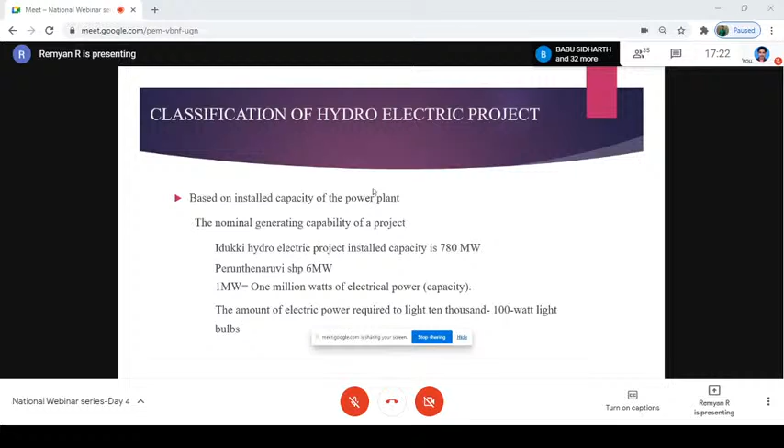One more thing: you can see that power equals 9.81 into H into Q. That means power is a function of net head available and discharge. If the head available is very high, you will get a very high power. Similarly, if discharge is high, you will get very high power values.

It depends on the type of project. Sometimes it is not possible to get more head, but discharge will be very high. For example, in our Bhoothathankettu hydroelectric project, the available head is maybe 10 or 12 meters, but the discharge is very high. So we propose this project in Bhoothathankettu.

Depending on the head available and discharge, there will be changes in turbine selection. If discharge is very high and the head is varying linearly, you can select a bulb turbine. In Bhoothathankettu we use a bulb turbine because head is varying but discharge is almost very high. So we selected the bulb turbine for the Bhoothathankettu hydroelectric project.

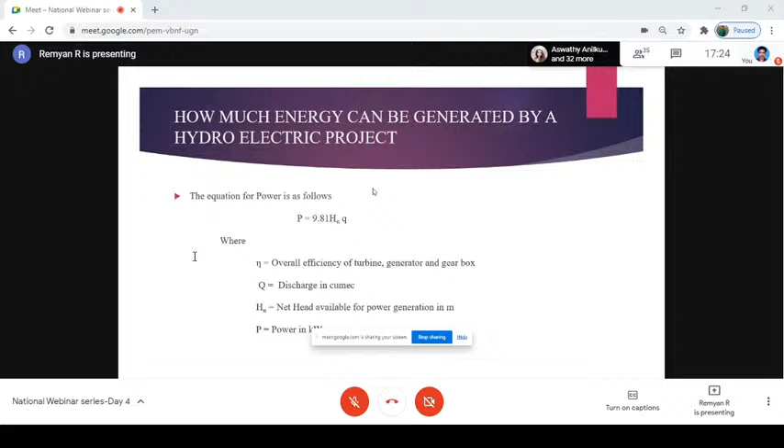Now, the classification of hydroelectric projects. Different countries follow different capacities for this classification. In India, if the installed capacity is up to 5 kilowatts, it is known as pico hydro, and up to 100 kilowatts is a micro hydro power project.

If installed capacity varies from 101 kilowatts to 2 megawatts, it is known as mini hydro project. If installed capacity is 2 megawatts to 25 megawatts, it is known as small hydro. Today our topic is small hydro, meaning the installed capacity varies from 2 megawatts to 25 megawatts.

This will give you an idea about the small hydro definition in different countries. In Italy, if installed capacity is less than or equal to 3 megawatts, it is known as small hydro. In Afghanistan and Iran, it's less than 5 megawatts. In Bangladesh and Thailand, less than 15 megawatts is considered small hydroelectric. In the US, it's less than 30 megawatts. In China and Pakistan, if installed capacity is less than 50 megawatts, it's known as a small hydro project.

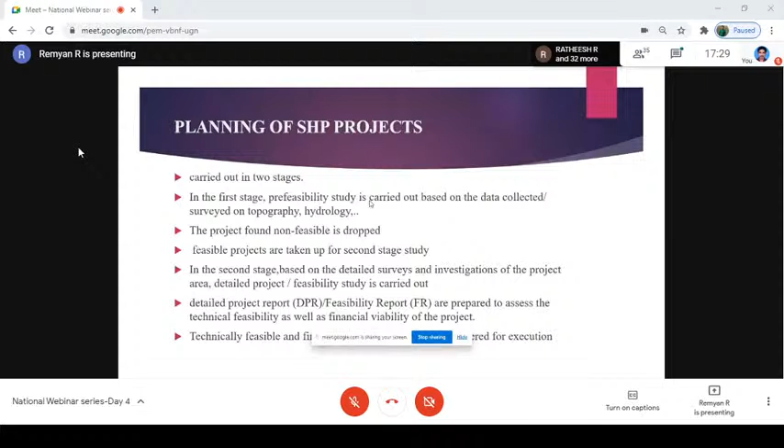Now, the types of small hydroelectric schemes. The most common small hydroelectric projects are run-off river, canal falls, dam-based outlet and spillways, pumped storage, and in-stream. Actually in KSEB, we mostly focus on run-off river.

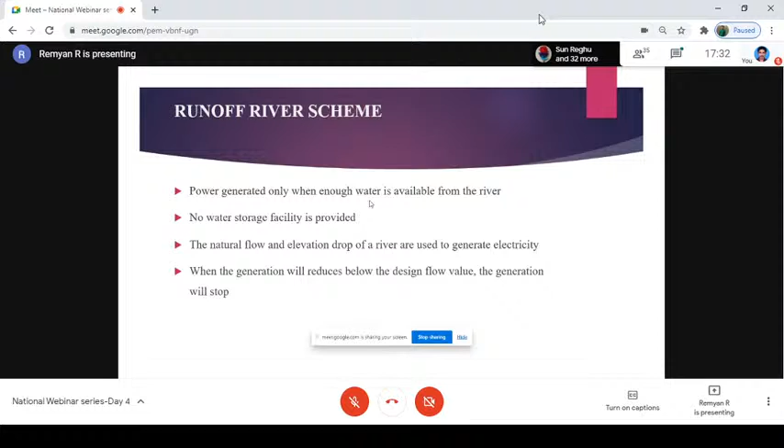When the generation will happen - okay, then this is the layout of the run-of-river schemes. We'll discuss all the components in detail.

Typical layout of a run-of-river scheme consists of an intake structure. This is the intake structure. Then there will be a desilting tank. This is the water conducting system or head race channel. Then there will be a forebay. Then another water conducting system, known as penstock. There is a difference between this penstock and head race channel - we'll discuss later. These are the main components. Then there will be a powerhouse, then tail race channel. These are the main components of a run-off river scheme.

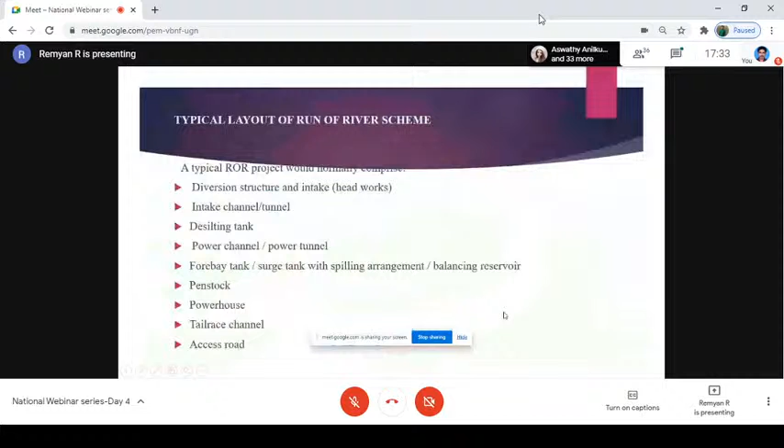Now the intake - first component is intake. Intake is a structure controlling entry of water from the river into the water conductor system. It prevents entry of trash, debris, and other floating materials, prevents entry of ice, and reduces the silt content. It secures the entry of water with minimum possible loss of head.

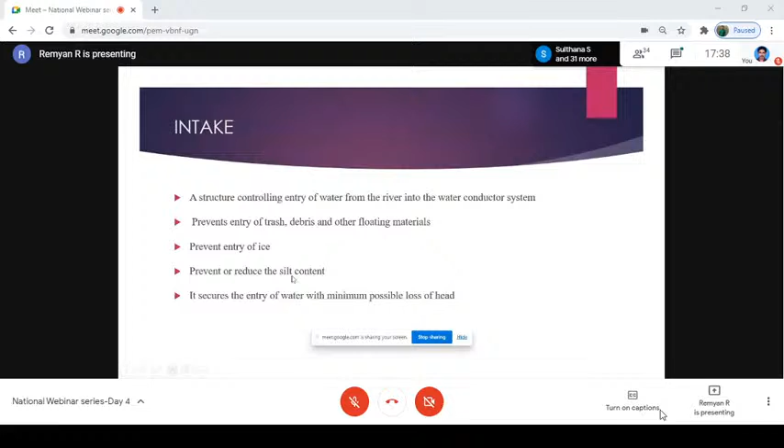Then there's the silt content. It's very important in Himalayan regions, though not in Kerala, since silt content in water is very high there. So we reduce the silt content, though it can't be entirely removed in the intake structure. Actually, it secures the entry of water with the minimum possible loss of head.

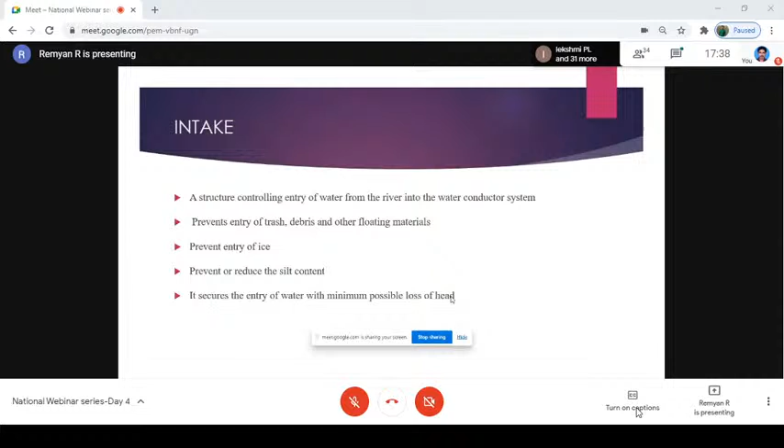For reducing the loss of head, we are providing a well smooth transition there. If you provide sharp edges instead, there may be high loss of head.

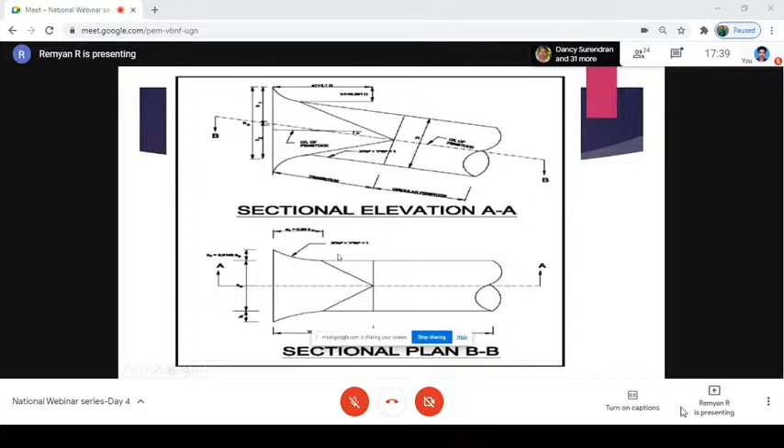This is the longitudinal section, and this one is the plan. The section is varying in both plan and elevation.

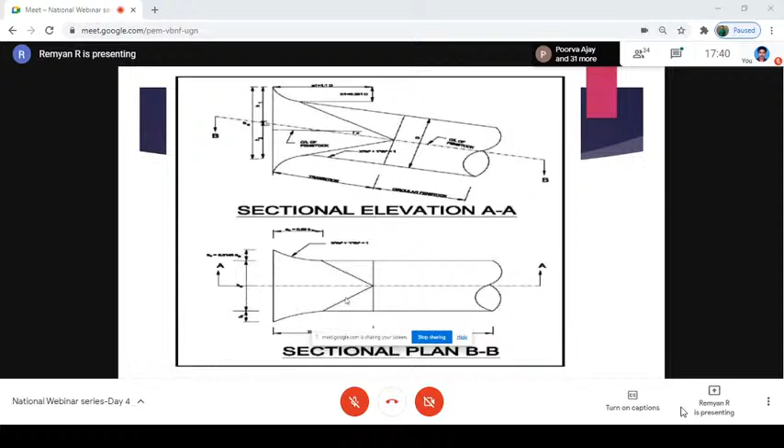The next one is the desilting tank. This one is a desilting tank. We are providing a desilting tank here. After entering water through the intake, it goes to the desilting tank.

Desilting tanks are provided for the settling action of small suspended particles. Now the water is flowing from this direction to our main desilting tank, which is provided here. Again, we are providing a smooth transition region here for settling the suspended particles.

The suspended particles can be removed through the desilting flushing tunnel. We are providing flushing tunnels here, and by flushing this, we can remove the silt content.

The water conducting system. This is our water conducting system. In between the forebay and desilting tank is the water conducting system, or head race channel.

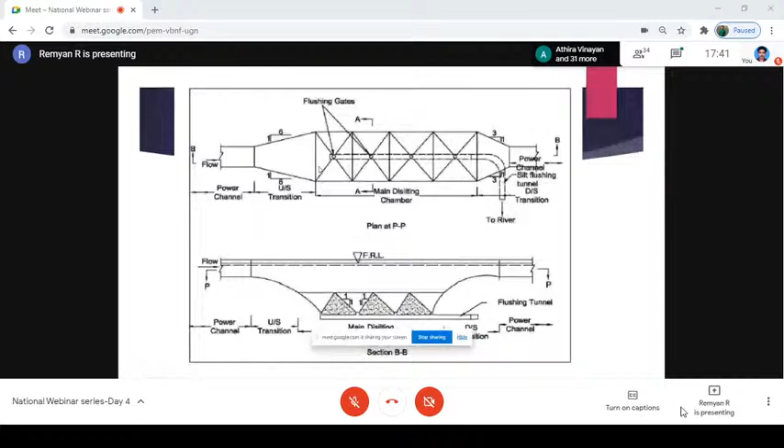There are different types of water conducting systems available. The first one is the earthen water conducting system, or unlined system, just like our soil surface. There is no lining or anything, it's soil itself. This is a canal section in cutting.

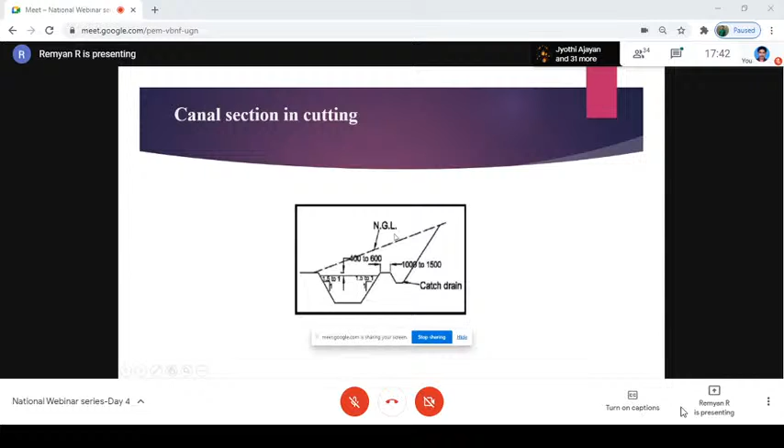In a canal section, it may be partially in filling and partially in cutting. Here, this is our normal ground level, and this is our water level, partially above and partially below the normal ground level.

This is a typical section of an open RCC channel. This is the RCC channel section.

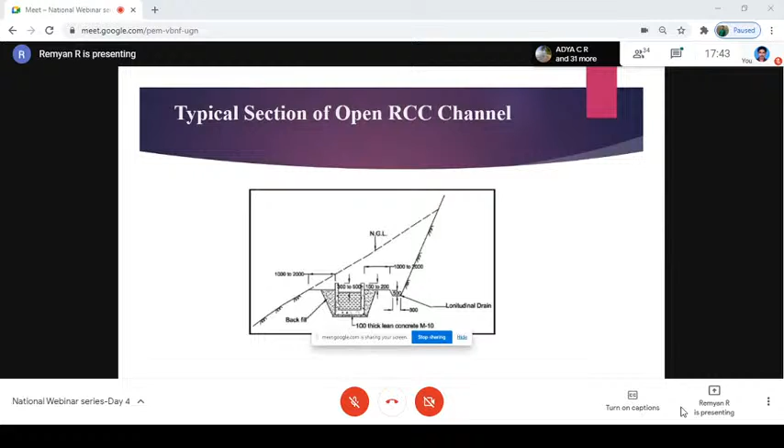Another option is a cut and cover RCC channel. Here the water level lies below the normal ground level. Constructing this wall up to the normal ground level may be costly, so in such cases we construct a cut and cover RCC channel.

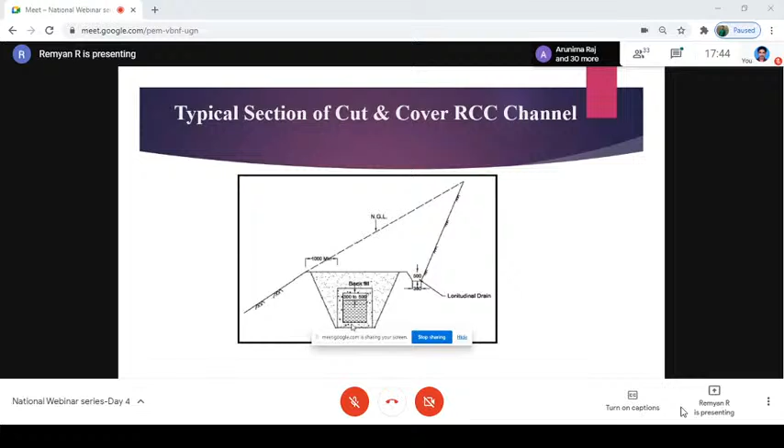Another important water conducting system is tunnels. There are specific conditions we need to satisfy before providing tunnels.

First, when the side slopes of the hills are too weak to support a canal. Second, when the side slopes are too steep to construct a canal. Third, when the river takes a sharp loop and the straight route taken by a tunnel is much shorter than the long route of the canal.

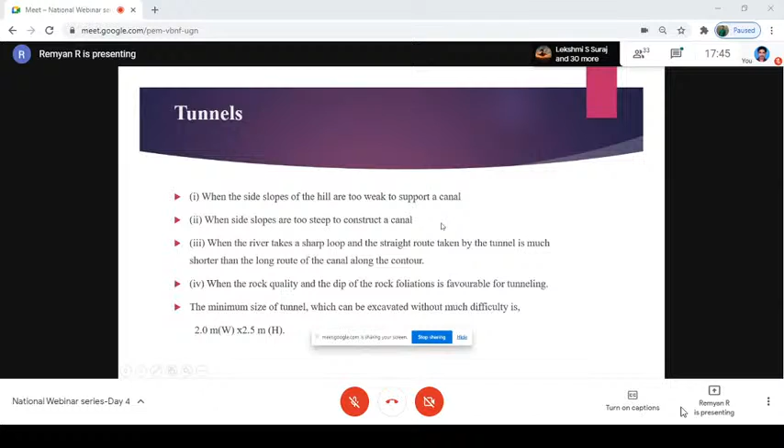Sometimes the river flows in an S-shape. In that case, it is easier to provide a straight tunnel connecting the entry point and exit point. This is more cost effective than constructing an S-shaped channel. So in that case we provide tunnels, which are nothing but small openings in the rocks.

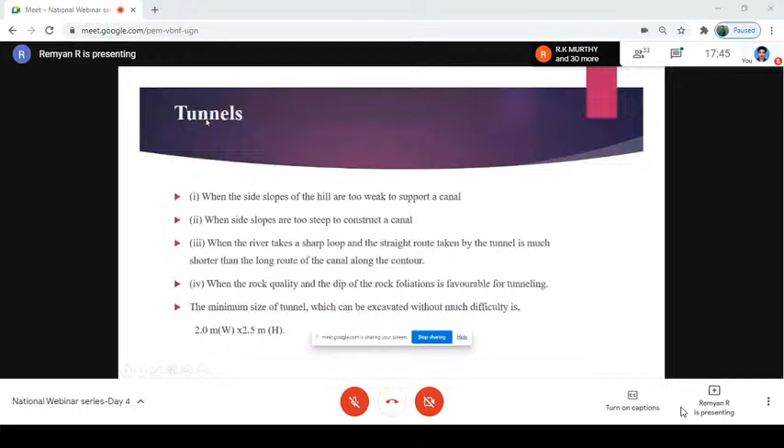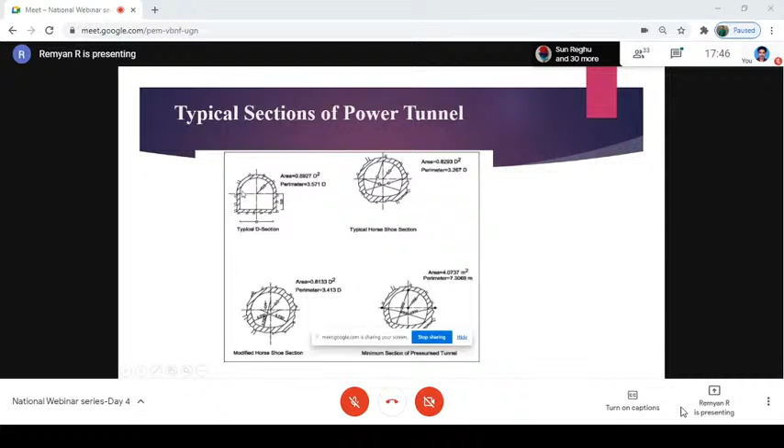This is a tunnel in rock. This is the rock surface. In all cases, there will be a minimum rock cover in the power tunnel.

The minimum vertical cover equals R, and the minimum horizontal cover will be 2R from the surface of the rock. R is nothing but the maximum internal pressure inside the tunnel. For example, if the maximum internal pressure in meters of water is 10 meters, then R will be 10 meters. If at another point the maximum internal pressure is 5 meters of water, then that distance will be 5 meters, and the other distance will be 10 meters.

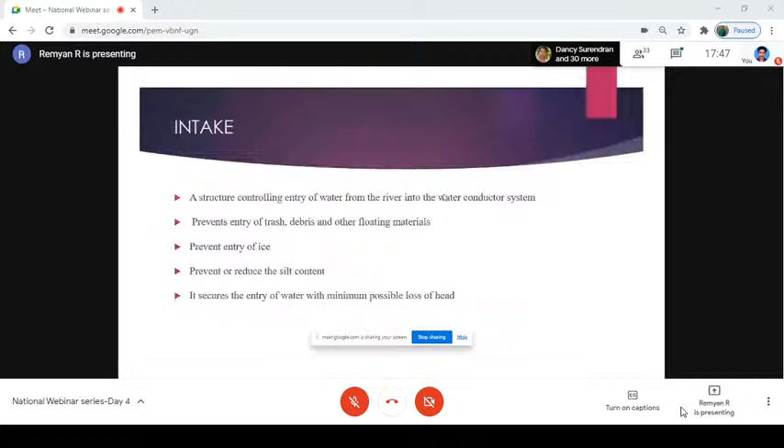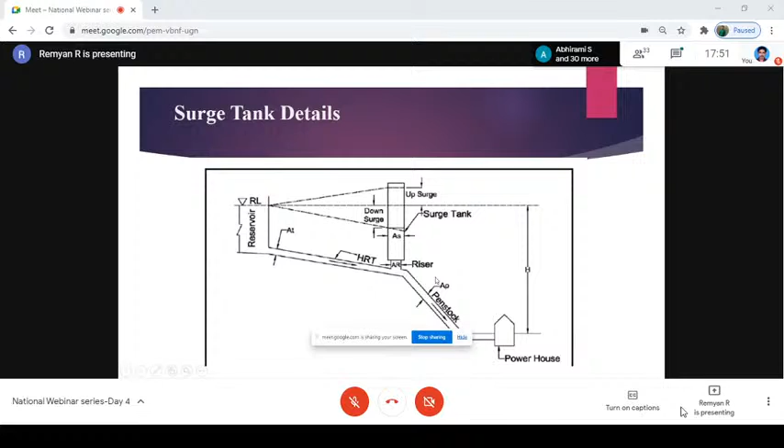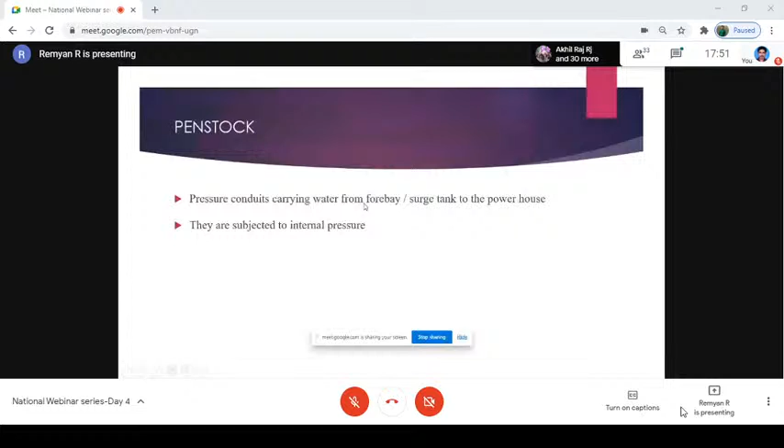പെൻസ്റ്റോക്ക് എന്ന് പറയുന്നത് pressure conduits carrying water from forebay or surge tank to power house. forebay എന്ന് പറയുന്നത് സർജ് ടാങ്ക് എന്ന് പറയുന്ന സെയിം കമ്പോണന്റ് തന്നെയാണ്. സ്മോൾ ഹൈഡ്രോ ഇലക്ട്രിക് പ്രോജക്റ്റിലാണ് forebay എന്ന ടേംസ് യൂസ് ചെയ്യുന്നത്. ഇൻ ലാർജ് ഹെഡ് പവർ പ്ലാന്റ്സിൽ സർജ് ടാങ്ക് എന്ന് പറഞ്ഞാണ് നമ്മൾ യൂസ് ചെയ്യുക.

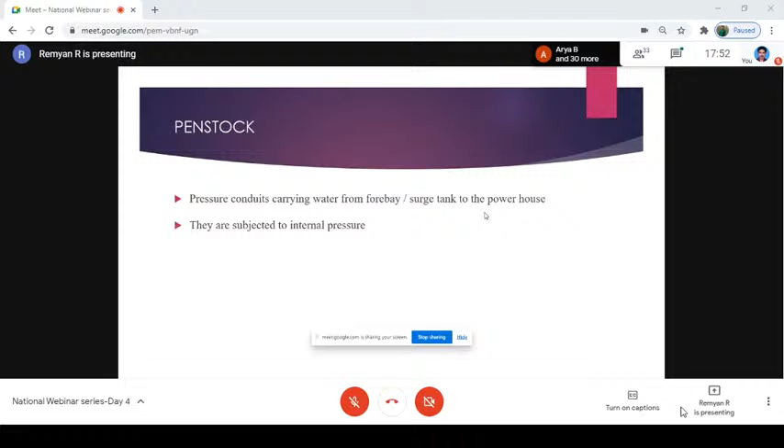അതേസമയം പെൻ സ്റ്റോക്കിൽ ക്ലോസ്ഡ് സിസ്റ്റം ആണ്. അതിനകത്ത് എപ്പോഴും ഇന്റേണൽ പ്രഷറാണ്. ഇന്റേണൽ പ്രഷർ മാക്സിമം ഈ എക്സിറ്റ് പോയിന്റിലായിരിക്കും, മിനിമം എൻട്രി പോയിന്റിലായിരിക്കും - ഇതാണ് പെൻ സ്റ്റോക്കിലെ pressure variation. അതേസമയം വാട്ടർ കണ്ടക്റ്റിംഗ് സിസ്റ്റത്തിൽ pressure will be always same as atmospheric pressure.

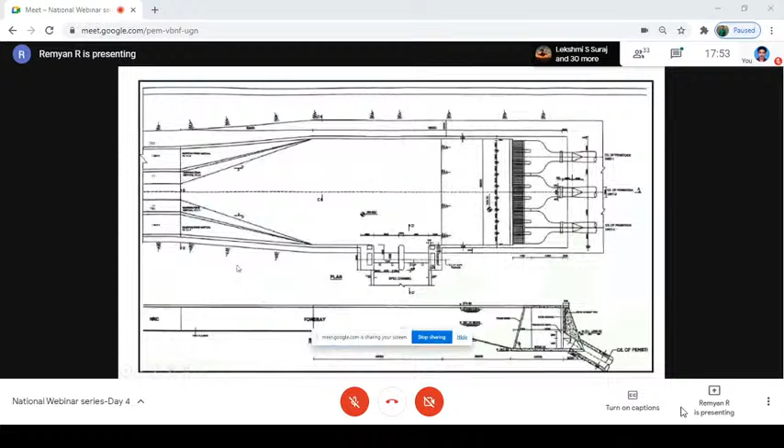ഇത് പെൻ സ്റ്റോക്കിന്റെ സെക്ഷൻ ആണ്. ഇതാണ് നമ്മുടെ പെൻ സ്റ്റോക്ക് എന്ന് പറയുന്നത്. പെൻ സ്റ്റോക്ക് ഈസ് സപ്പോർട്ടഡ് ഓൺ കോൺക്രീറ്റ് സ്ട്രക്ചർ. ഈ സ്ട്രക്ചറിനെ പറയുന്ന പേരാണ് സാഡിൽസ്. സാഡിൽസ് ആണ് ഈ പെൻ സ്റ്റോക്ക് സപ്പോർട്ട് ചെയ്യുന്നത്.

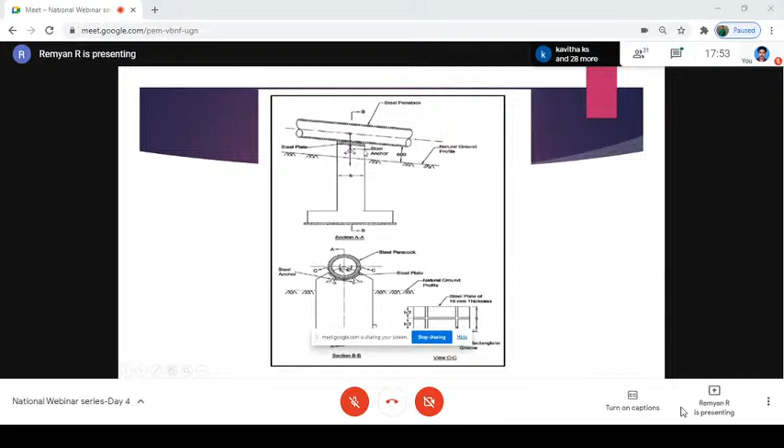പാലക്കാട്, പത്തനംതിട്ട - നമ്മുടെ മൂഴിയാർ പ്രോജക്ട് ഗവി പോകുന്ന വഴിയിൽ ഇങ്ങനത്തെ പെൻ സ്റ്റോക്ക് നമുക്ക് കാണാൻ പറ്റും. റൂട്ടിൽ തന്നെ, ഗവി പോകുന്ന റൂട്ടിൽ, മൂഴിയാർ ഗവി റൂട്ടിൽ തന്നെ ഈ പറയുന്ന പെൻ സ്റ്റോക്ക് അവൈലബിൾ കാണാൻ പറ്റുന്നതാണ്. ഈ സാഡിൽ സപ്പോർട്ട് എവരി 3 മീറ്റർ ടു 2 മീറ്റർ ഡിസ്റ്റൻസിൽ നമ്മൾ പ്രൊവൈഡ് ചെയ്യും. ഒരു 10 മീറ്റർ റീച്ച് ചെയ്യുമ്പോഴേക്കും നമ്മൾ ഒരു വലിയൊരു സപ്പോർട്ട് പ്രൊവൈഡ് ചെയ്യും, അതിന് ആങ്കർ ബ്ലോക്ക് എന്ന് പറയും. ഇൻ ബിറ്റ്വീൻ ആങ്കർ ബ്ലോക്കുകളാണ് ഈ സാഡിൽ സപ്പോർട്ട് കാണാം.

ലാസ്റ്റ് പവർ ഹൗസ്. പവർ ഹൗസ് എന്ന് പറയുന്നത് power house are to support and house the generating units etc. അതായത് പവർ ഹൗസിലാണ് നമ്മുടെ ഈ ടർബൈനും ജനറേറ്ററും കൺസ്ട്രക്ട് ചെയ്തിരിക്കുന്നത്. പവർ ഹൗസിലാണ് ഈ പറയുന്ന എനർജി കൺവേർഷൻ നടക്കുന്നത്, അതായത് ഇലക്ട്രിക്, നമ്മുടെ ഹൈഡ്രോളിക് എനർജി ഇലക്ട്രിക് എനർജി ആയിട്ടുള്ള കൺവേർഷൻ നടക്കുന്നത് എപ്പോഴും ഇവിടെയാണ്, പവർ ഹൗസിലാണ്.

ഹൈഡ്രോളിക് എനർജി മെക്കാനിക്കൽ എനർജി ആയിട്ട് കൺവേർട്ട് ചെയ്യുന്നതാണ് നമ്മുടെ ടർബൈൻസ്. ടർബൈൻസ് ജനറേറ്ററുമായിട്ട് കണക്ട് ചെയ്തിരിക്കും. ഈ ജനറേറ്റർ ഈ മെക്കാനിക്കൽ എനർജിയെ ഇലക്ട്രിക് എനർജി ആയിട്ട് കൺവേർട്ട് ചെയ്യും. IS 128 ൽ നമുക്ക് ടിപ്പിക്കൽ സെക്ഷൻസ് ഓഫ് പവർ ഹൗസ് അവൈലബിൾ ആണ്. ഇത് ടർബൈൻ, then generator. This turbine will convert the hydraulic energy into mechanical energy. Then generator will convert this mechanical energy into electrical energy.

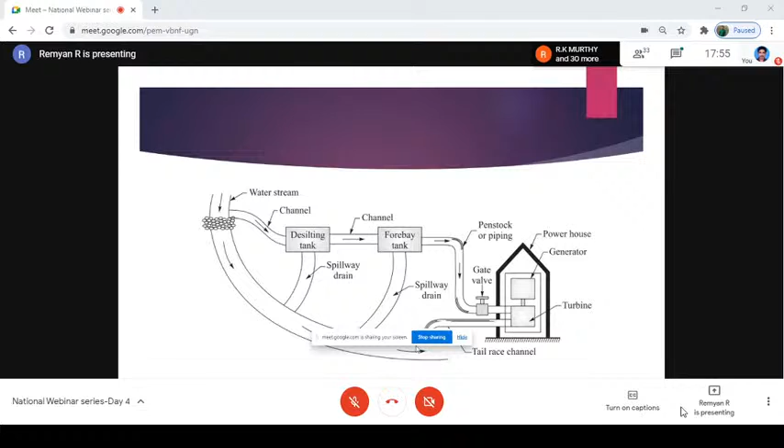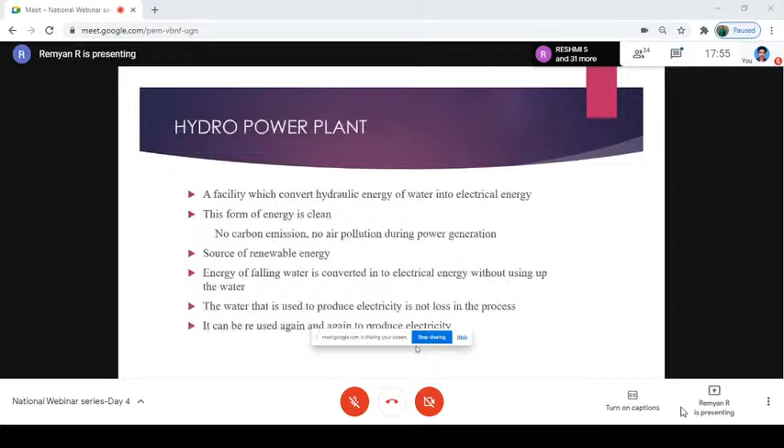The last component is tail race channel. Tail race channel - നമ്മുടെ പവർ ജനറേഷൻ കഴിഞ്ഞ വാട്ടറിനെ നമ്മൾ ടെയിൽ റേസിൽ കൂടി റിവർ സ്ട്രീമിലോട്ട് തന്നെ ഡൈവേർട്ട് ചെയ്ത് കഴിയും. Tail race channel, power house generate ചെയ്ത വാട്ടർ ഈ tail race കൂടി നമ്മൾ മെയിൻ റിവറിലോട്ട് തന്നെ വിടും.

ഇപ്പോൾ മെയിൻ പ്രോബ്ലം എന്ന് പറയുന്നത്, സ്മോൾ ഹൈഡ്രോ ഇലക്ട്രിക് പ്രോജക്റ്റ് കൺസ്ട്രക്ട് ചെയ്യുമ്പോൾ മെയിൻ റിവറിലോട്ട് തന്നെ ജനറേറ്റ് ചെയ്ത വാട്ടർ എപ്പോഴും ഡൈവേർട്ട് ചെയ്ത് വിടണം. ആക്ച്വലി പണ്ട് ഇതൊരു ഇമ്പോർട്ടന്റ് ടേംസ് അല്ലായിരുന്നു. ഫോർ എക്സാമ്പിൾ മൂഴിയാർ പവർ ഹൗസ് നോക്കുകയാണെങ്കിൽ മൂഴിയാറിലെ വാട്ടർ എന്ന് പറയുന്നത് നമ്മൾ കക്കി ഡാമിൽ നിന്നും ഡൈവേർട്ട് ചെയ്ത് വേറൊരു സ്ട്രീമിലോട്ടാണ് വിടുന്നത്. പമ്പ റിവറിലോട്ട് വിടുന്നതല്ല, കക്കാട് മണിയാർ എന്ന് പറഞ്ഞ വേറൊരു സ്ഥലത്തേക്കാണ് ഡൈവേർട്ട് ചെയ്തത്.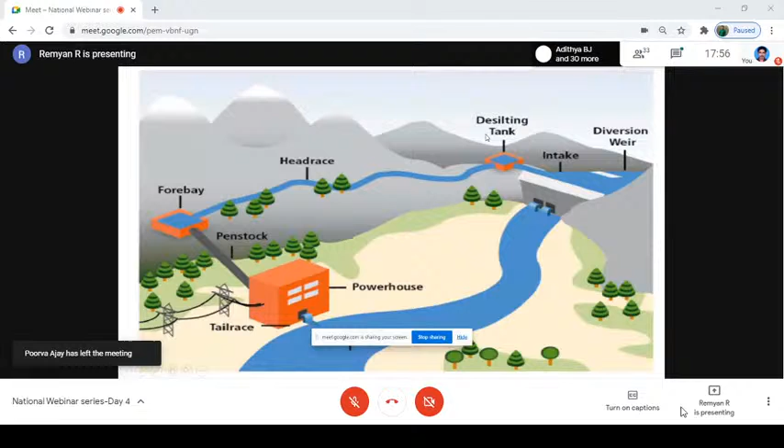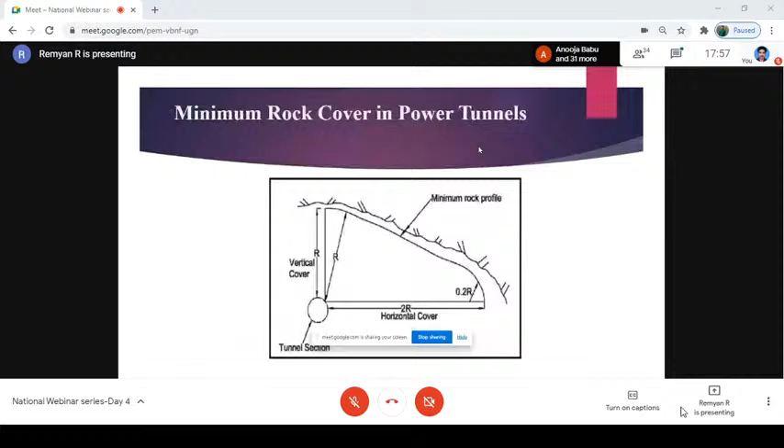ഇപ്പൊ അങ്ങനെ നമുക്ക് ഡൈവേർട്ട് ചെയ്യാൻ പറ്റത്തില്ല. നമ്മൾ ജനറേറ്റ് ചെയ്യുന്ന വാട്ടർ അതേ സെയിം റിവറിൽ തന്നെ പ്രൊവൈഡ് ചെയ്യണം. അപ്പോൾ ഇതാണ് നമ്മുടെ മെയിൻ ആയിട്ടുള്ള സിവിൽ ഭാഗം. ഞാൻ സിവിൽ പാർട്ട് മാത്രമേ ഡിസ്കസ് ചെയ്തിട്ടുള്ളൂ, മെക്കാനിക്കൽ പാർട്ടൊന്നും ഡിസ്കസ് ചെയ്തിട്ടില്ല.